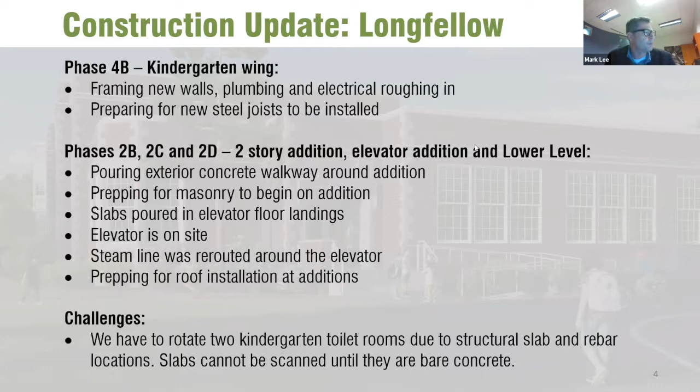Let me get my cursor over here. So some of the updated construction photos - we see the administrative desk countertop, and that's in the corner by the entrance. We also see it in the area.

You can see now the new security window that goes out to that vestibule by the main entrance - what we're calling the main entrance now - and then this workstation as well. So these two workstations are adjacent to one another, with direct visual connection to visitors coming in, and they have to be screened before they're let into the building.

On the upper row, classroom 101, classroom 102 - those were two classrooms we talked about last time that were not ready to turn over at the beginning of the school year. Now they're set up, as you can see, with furniture in them. They were waiting on flooring - the flooring is now in.

The other picture of the reception desk on the upper right, again, the transaction window, or the observation window into the vestibule. People coming into the front office are greeted in this area as well. So it's still being set up.

The teacher's room - the second one from the left on the bottom. You can see some of the counters, and then where the hood or where the range goes, we have a hood up here. It's a stove range hood that requires a fire suppression system - so that's when it says Ansul system, it's the fire suppression system that goes in that.

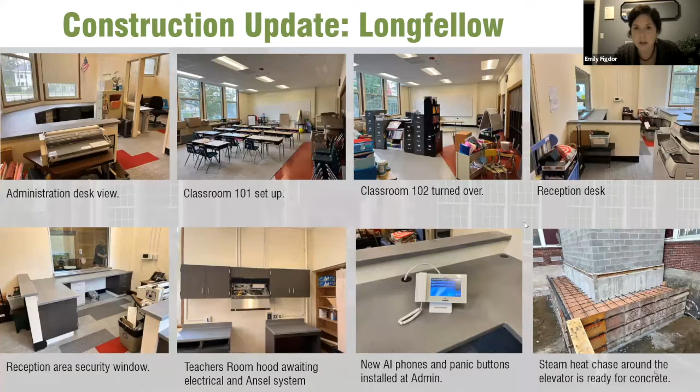Any questions on this? If so, use your electronic hand, because I cannot see everyone now. But I don't see anyone. Mark, go ahead.

With Reiche, the update is that on phase 4, which is where we're working right now, we have some underground piping that's complete, and concrete cuts have been infilled with new concrete. So below slab work, we cut it open, we do the below slab work, and then we have to fill the concrete in again. Remaining wall framing is being completed to allow for utility rough-ins and inspections.

Challenges: the second flooring contractor has not been showing up when expected. That's delayed things. They were expecting to get the lobby ramp and stairs completed over Indigenous Peoples' Day weekend, but only completed the lobby. You'll see pictures of the lobby flooring—this seems to be one of the aspects contractors are constantly dealing with right now, with tight labor markets and still a lot of construction work out there. Sometimes getting contractors to show up is a challenge.

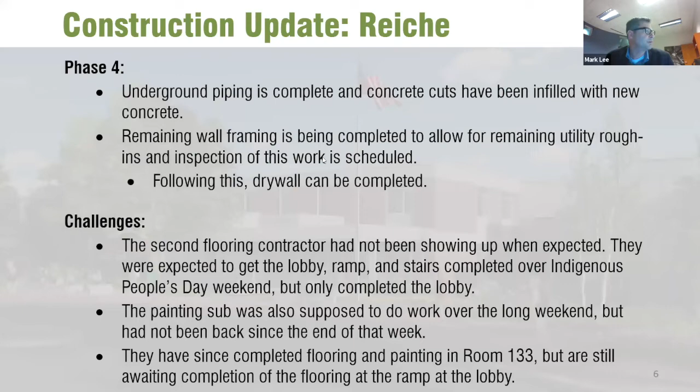I'm trying to see if that even had—it said it was, didn't say when, I guess. I was assuming it was going to be this week. Let me look at my notes. We were just talking about that today. I believe it happened.

And more importantly, especially if it happened, what are the implications of that being inspected and ready to go? So the inspection did happen—it was a week later than they wanted it to be.

We haven't seen an implication per se, but it does cause them some concern going forward in the project that if the inspections are delayed a week, it may impact things. So we're looking at that closely with them. I know there was a question, Javier, about trying to turn things over a week early, and we've requested that of the contractor, and they are reviewing it at this time.

Did that address your question? Yep, thank you. Okay.

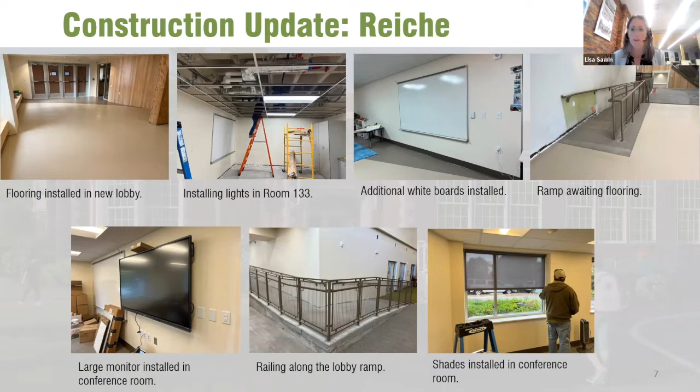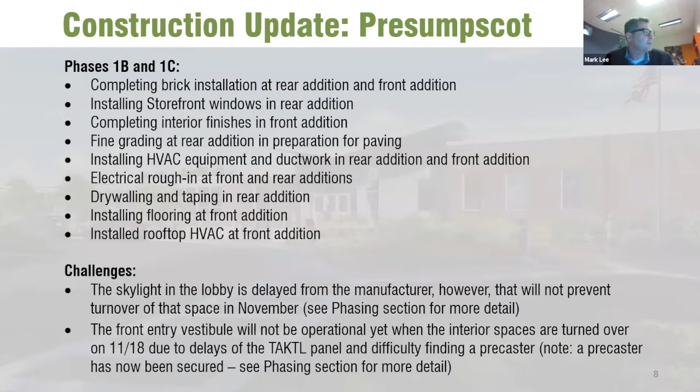Very good. Moving on to Presumpscot, Phases 1B and 1C, completing the brick installation at the rear addition and the front addition.

Phase 1 is largely the scope of work of the additions, and we'll see some images of the brick. I think the images are all going to be at the rear of the rear addition, but you can see it as you drive up to the front of the school, the improvements at the front as well. They're installing the windows in the rear addition, and completing the interior finishes in the front lobby and front addition, the rooms in the front admin area. They're doing some fine grading at the rear addition in preparation for paving, so really getting close in that regard.

Installing HVAC equipment and ductwork in the rear and front addition. Electrical rough-ins at the front and rear addition, drywall and taping in the rear addition, installing flooring at the front addition, and installing the rooftop HVAC at the front addition. So really progressing rapidly to the interior finishes of the space at the rear.

Challenges, I think we mentioned some of these before as well. The skylight is delayed from the manufacturer, but the ability to use the space just means the installation of the skylight will go on afterwards. So we'll have a watertight cap over that opening, but we'll put the skylight on as soon as it comes in. And then the front entry vestibule will not be operational when the interior spaces are turned over.

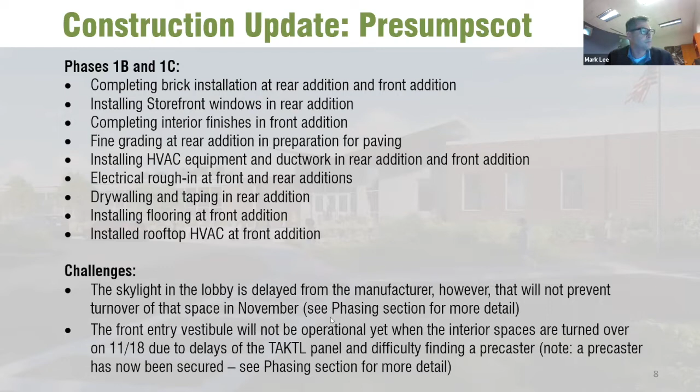Yes, Dave, go ahead please. Yeah, just two updates on this from yesterday. They were able to complete the paving, the base course paving on site. And again, as of yesterday, they have found a local precaster to make those stair side pieces for them, so those are moving along.

Excellent. So as was noted, the fine grading is going along around the rear addition. You can see the base of the building, and you can see where the new gravel has been brought in.

And they're hanging drywall, so you can see the wallboard panels being screwed to the metal framing at the rear addition. The flooring is progressing in the front area, so this is where you come into what will be the enlarged existing lobby, and you can see the flooring going down there.

It was observed that they're protecting the finish walls from flooring prep. Sometimes when a contractor gets in there, one contractor may not be that concerned about a product or area that's already finished, so they're being very careful to protect it so new work doesn't damage someone else's new work.

The taping of drywall in the rear - as soon as they get those wall panels up, taping can occur. That whole sequence of getting inspection of the rough-ins in the wall allows them to move forward with the drywall panels, and then getting the final finish on the walls ready for paint.

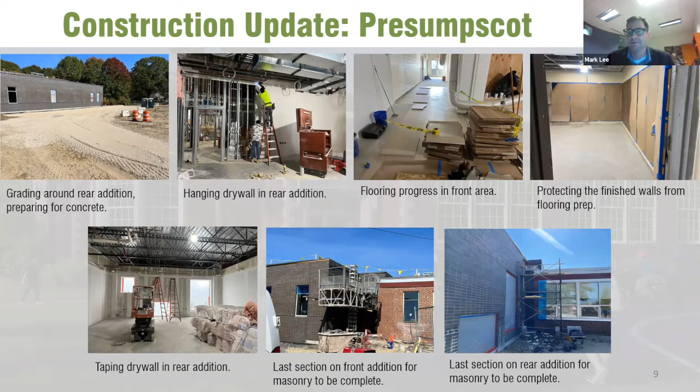Apparently they were reviewing that after our meeting on Wednesday, and so we anticipate seeing that in the very, very near future.

Harriman is working with Blane Casey to see if phases 2B, 2C, and 2D can be turned over early to allow the contractor to take over the entire second floor at once and not have to separate construction. So this is a little bit different phasing than what we went forward with, but there's a lot of advantages if we can make this happen to where we can actually complete the project earlier.

So essentially they would finish the addition to 2C and 2B early to be able to then just have the construction up on the second floor. So the contractor's separate from the students. The students are on the lower 2 floors.

It then allows us to remove the portables earlier and be able to pretty much come in and just do site work in the fall. We don't know if we can do that yet, but that is something that we are actively exploring because there's a lot of benefit to that.

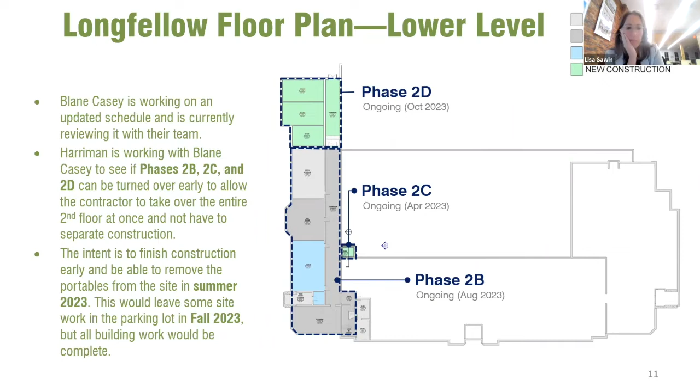Let's go to the next slide.

Next slide. There you go. Updating remaining items in phase 4A,

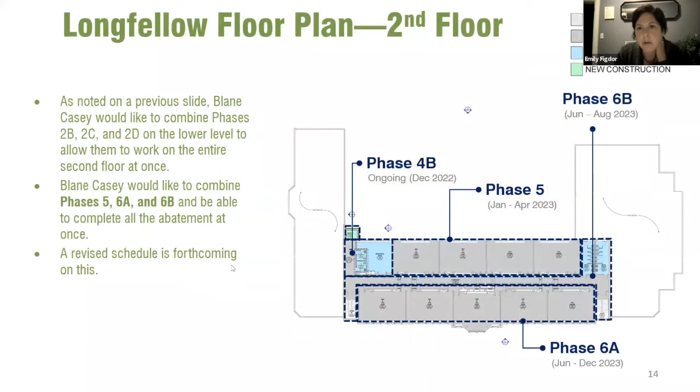Can I interrupt you for a second? Aura has her hand up. Go ahead, Aura. We just advanced a bunch of slides there, Mark.

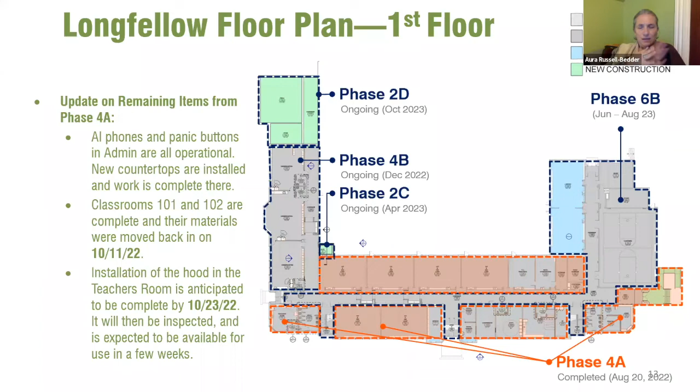I was just curious, from the last slide, when you mentioned the building work versus the site work, and the plan to potentially complete some of that work. That was the building work, but could you give a couple examples of what the site work is? I'm curious how disruptive the site work is for staff.

The site work we're referring to is mostly the area where the portables are. The impact is you won't have that parking area back in the fall because they'll be working there to remove the portables and restore that area to its original condition. However, that work was intended to be later in the timeframe.

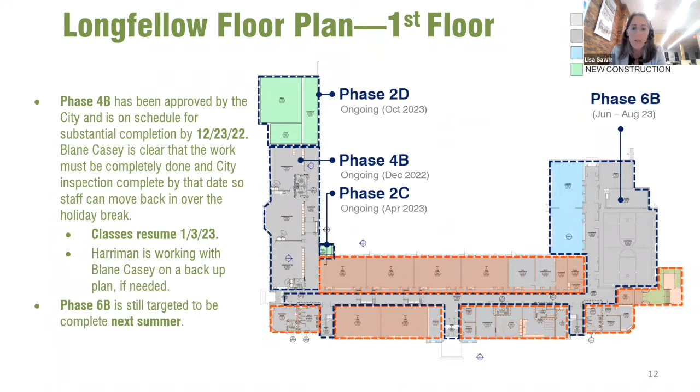If it pushed out to when it was supposed to happen, you'd need those portables through the fall, and then they'd have to hang around even longer because we'd be in winter and they couldn't be removed until spring or summer of the following year. So essentially the contractor is trying to get off the site early so they don't have to hang around and wait.

Thank you, I didn't understand that the site work meant that site. Yeah, good question.

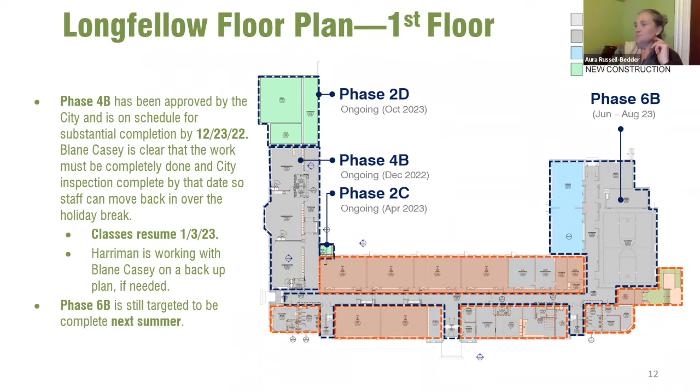So phase 4A was the phase we went through this summer, and these are the things that were remaining from our last update, which we also saw in the imagery Mark presented.

In the front office, the admin area, the AI phone and panic button is operational, and the new countertops are installed with work completed there. There are a few miscellaneous pieces of trim here and there still being punched out, meaning the contractor is finishing those remaining items.

Classroom 101 and 102 are complete, and their materials were moved back in on October 11th. Those are the two classrooms where the flooring was not complete and the casework wasn't complete.

Installation of the hood in the teacher's room is anticipated to be completed on October 23rd, so a couple days out, and will be inspected, expected to be available for use in a few weeks.

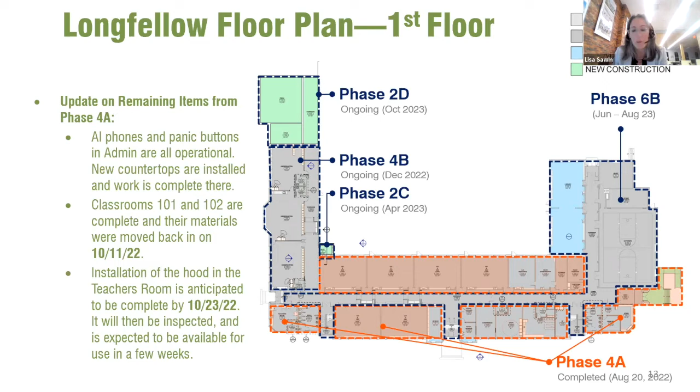As noted on the previous slide, Blane Casey would like to combine phases 2B, 2C, and 2D on the lower level to allow them to work on the entire second floor at once. They'd also like to combine phases 5, 6A, and 6B to complete all the abatement at once, essentially taking over the second floor area of 5, 6A, and 6B. A revised schedule is what they're working on right now.

We're anxious to get our hands on that schedule so we can map out how this will work, what that looks like for turnover of spaces, what our windows are for that, and if we have any concerns there.

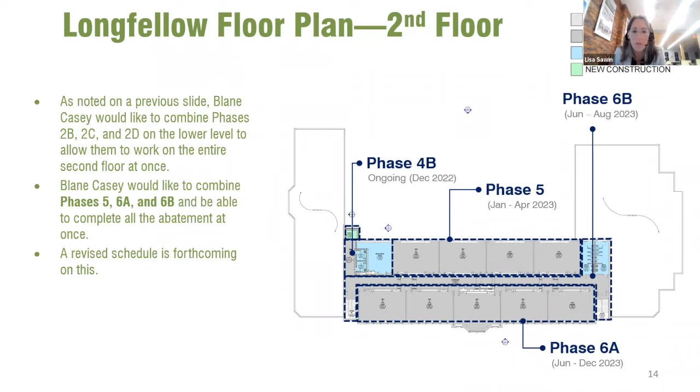Any questions on Longfellow before we move to Reiche? Okay, so Reiche, this is the first floor.

Phase 4, the classroom, the blue classroom bar at the bottom of the page, is scheduled to be substantially complete on December 16th, with final completion on January 6th, and classes resume on January 3rd. No delays are anticipated with meeting this schedule.

We've asked that they look at turning it over a week earlier. Hardypond provided a detailed schedule this week, and we're currently exploring with them if they can move substantial completion up to December 9th. That allows time for the school to do the cleaning and moving they need, and have teachers back in their classrooms ready to teach when school starts. That's what's being explored at this time.

Phase 6 is ongoing, targeting completion in summer of 2023.

The second flooring contractor had been expected to complete the lobby, ramp, and stairs on Indigenous Peoples Day weekend, but only completed the lobby. The painting sub was also supposed to do work that weekend but hadn't been back since the end of that week. They've since completed flooring and painting in room 133, but the flooring contractor has not yet completed the ramp at the lobby. We're having a little trouble with some subs getting work completed as anticipated, and we're staying on top of that with the contractor. If anything else arises, we'll let folks know.

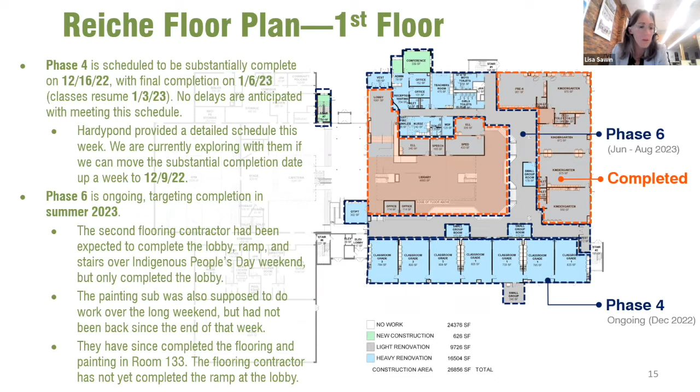Now we've moved upstairs to the second floor. Phase 5 is in the same location as phase 4, just upstairs—the bottom of the floor plan, that blue classroom bar with the spaces there. Phase 5's completion date is June 16th and is not critical because it flows into the summer.

Phase 6 is critical to complete on time so kids can return in fall 2023. No problems are anticipated in achieving this target. Hardypond may try to start art and music, which is phase 7 in the upper left corner, next summer, but they're still reviewing that. If they're able to start that in the summer, it just means they can get a jump start on completing it on time, if not sooner.

Then there's the roof work—the plaza between the community side and the school side. Update on that: we are investigating the solution for mitigating the water intrusion there, and doing investigative work to understand what was physically built in that location so we can prevent the water intrusion. They've cut one hole open through the top layer of the topping slab and found the recent waterproofing was done with 'Blueskin,' which is not the right material for that location—essentially like building wrap you'd find on the outside walls, not here. So it's the incorrect product, and the existing condition differs from what the drawings show. We're looking to do another investigation to understand more, but with the weather we've been having it's been challenging. They're hoping to get that done next week so we have a clearer picture on how to resolve that area.

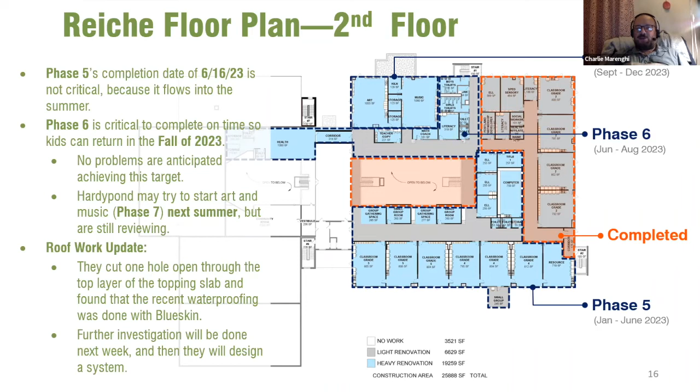Mr. M, please go ahead. Thanks, Emily. Just to reiterate and add: it's critical for future phasing that the plaza roof issues are resolved, as they affect other things like the finishing of the OT room and the use of that roof to access phase 7. To be fully transparent and keep everyone on the same page, this has to be resolved so other phases aren't affected, and that work is ongoing.

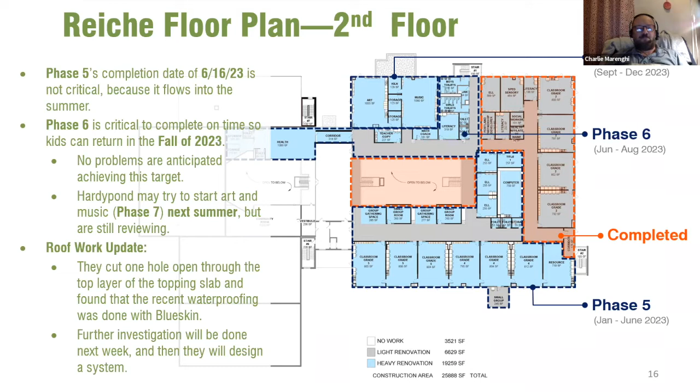Interesting to see how things were resolved in the past—let's resolve it now. We're renovating the building, let's take care of it now. Thank you, Emily, those are great points. Thank you, Charlie. Yes, as I said, in the last couple of weeks there's always been water at Reiche—let's actually get it fixed. Okay, thank you, thank you, Charlie.

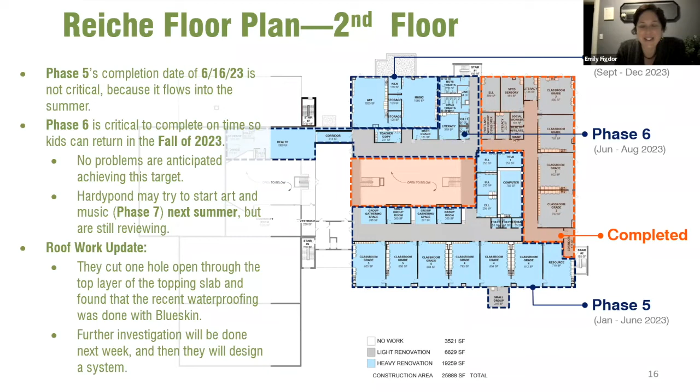Thank you, Lisa. I think we can go ahead. Excellent, so moving on to Presumpscot.

Presumpscot is one level, so this is the plan for Presumpscot. Here's an update on some things that were in the process of being completed since the last time we met.

The staff toilets in phase 1A were completed about a week late due to the Tectum deck, and those have been turned over.

The corridor below the gymnasium, the OT PT area, the social worker space, and the storage—those three rooms passed inspection by the city on 10/17 and have been turned back over to the school, providing those spaces for use.

Also in phase 1C, which is the front addition, turnover of the front addition is slated for November 18th, 2022. All interior spaces will be available for use at that time.

The skylight will be drywall capped due to delays from the manufacturer, but all soffits and lighting will be installed and the lobby will be fully operational. When the skylight becomes available, contractors will install it over the weekend so it doesn't impact school.

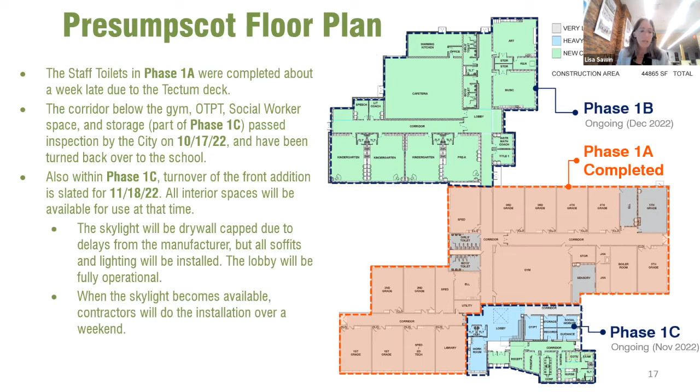On the next slide, the front entry as part of 1C will not yet be operational with the interior spaces when they're turned over on November 18th. This is due to the ramp and stairs on the exterior.

That material required finding a precaster, which we just found, as Dave indicated. The TAKTL panel, which is the exterior panels, had delays too—they secured a precaster early last week and are waiting for hard dates for completion. Essentially, that front entry will be turned over with the back addition at this time, as we understand it.

The school is aware of that, and we'll continue to use the side entrance until that time. The TAKTL panels, the exterior material at the entry, will be set to ship at the end of the month, and the contractor expects to have both these items completed by the end of December, if not sooner.

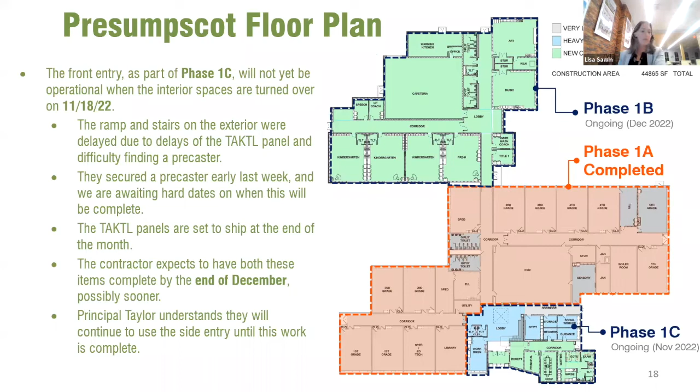Phase 1B, the back addition, was contractually scheduled to be completed January 11th, 2023. But the contractor feels they will be done ahead of schedule and expect to be ready for code inspections on December 18th, 2022.

We are watching that very carefully to understand whether they'll be able to do that, and they're to provide us updated information in the coming weeks. The only potential delay we're aware of is a LEED requirement to flush out the space.

Essentially that's a full air exchange of the space, and there are certain parameters we have to meet to do that. There are different ways we can achieve it—some options take multiple days, some take weeks—and we're working through that right now with our sustainability consultant.

This is not a prerequisite point, and we're looking at that too with our sustainability consultant to make sure whether this would be a critical point to consider for any additional days. So that's all being looked at very carefully from all angles right now, to understand if there will be any impacts to the schedule.

Any questions on Presumpscot? Can I just ask Lisa, since I don't really understand the process of flushing the space - what are the benefits of that?

So essentially, you have to move everything in - all your furniture, all your items. The building is complete, and it flushes the whole space out with certain air exchanges. The idea is if there's anything left over from construction, it gets flushed out before the occupants come in - any off-gassing or contaminants - so bringing in lots of fresh air will make the indoor air better.

So would that be a consideration of the time it might take, if it was weeks - was that an expected step? That's part of it - whether the contractor fully accounted for it in their schedule, which is what we're working through with them right now. Okay, thank you.

Just on the site work at Presumpscot - when is that scheduled to be completed? Both the back - I know you guys said they were doing the fine grading, the portables, all of that stuff - when is that being done? And then the front, when is that being brought up to specs?

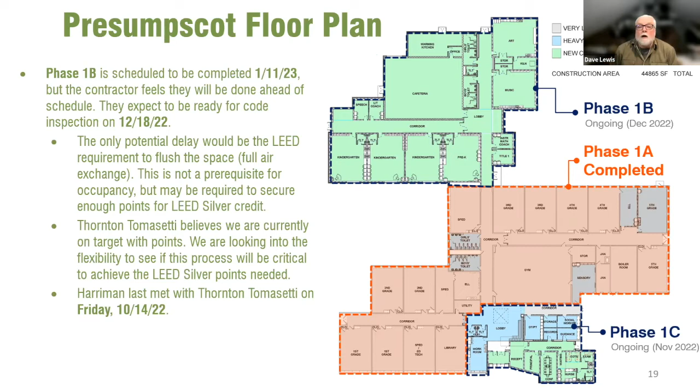I just want to add, following up on a lot of Lisa's commentary - we're stressing with all three contractors the need for them to develop two crystal clear plans: their detailed plan for turnover for the immediate areas coming up, and also a backup plan if something happens, like they can't get an inspection by a certain day. We're stressing with them to have dates and a backup plan, and they're all sensitive to that and working on it. We're all anxiously awaiting their schedules and commitments to dates.

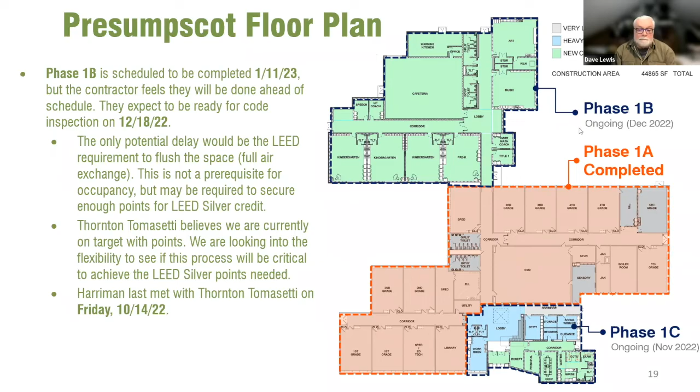Good, we've already had the update on the owner's rep, unless Dave, you have anything else to add? No, just quickly, for those who don't know me, I'm an architect.

And we're glad to have you back, Dave. And I've learned a lot tonight too, from the presentation.

Excellent. As we've now started doing, we'll provide an update on the contingency as it progresses monthly here. So the original project contingency funds, starting at Longfellow, were...

$554,000. The adjustment we made was to bring it to 961. To date, we've spent 473. So that's the updated amounts for expended to the contractor and change orders. Right now we're looking at $487,000 as the remaining contingency for Longfellow.